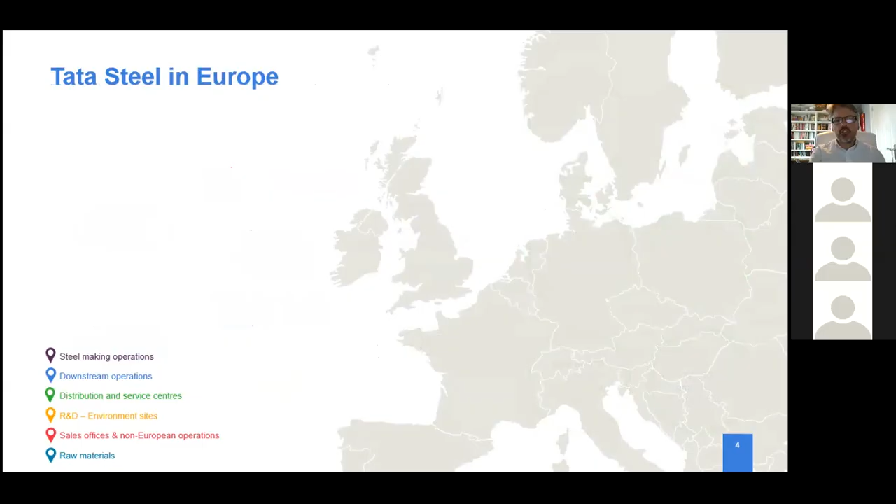In terms of Tata Steel in Europe, this is a busy slide, but we're one of the most geographically diversified steel producers in the world, or will be. We operate in 25 to 26 countries, with commercial offices in 35. Within Europe, we're one of the largest steel producers. We have two main steelmaking centres in the north of the Netherlands and in South Wales, with quite a few downstream manufacturing bases throughout Europe, which will become important later in the presentation, as well as a multitude of distribution and service centres shown there in green. Our R&D and environmental operations are centred in the Netherlands, South Wales and the centre of England.

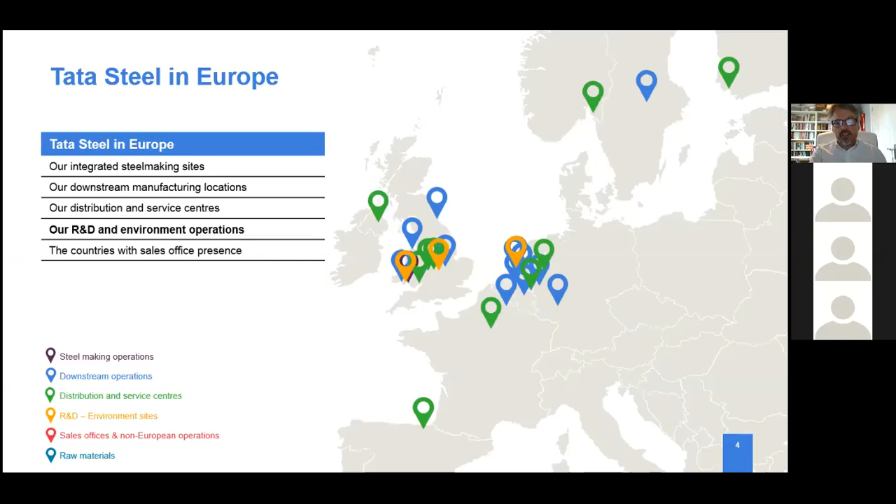In terms of Tata Steel in the UK, we're the largest steel company, and as such clearly act as a key foundation to many other industries and supply chains. We employ around 9,000 people engaged across academia, communities, and many other external partnerships, some of which we'll talk about today.

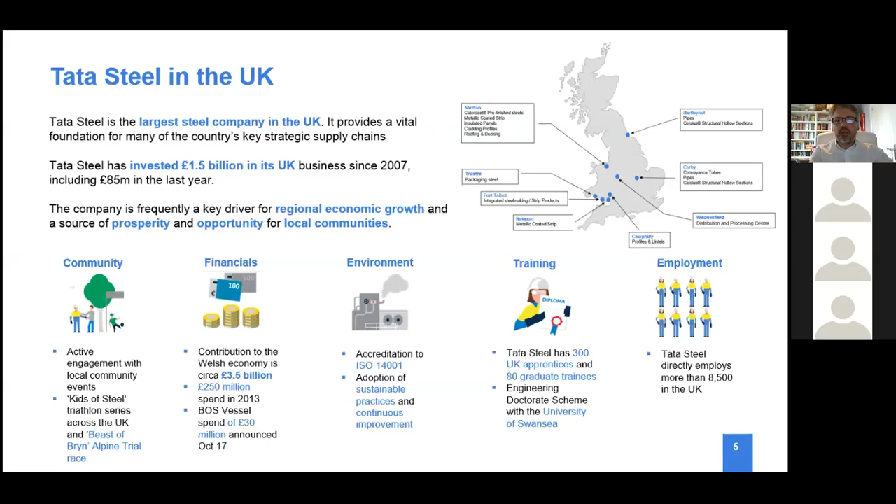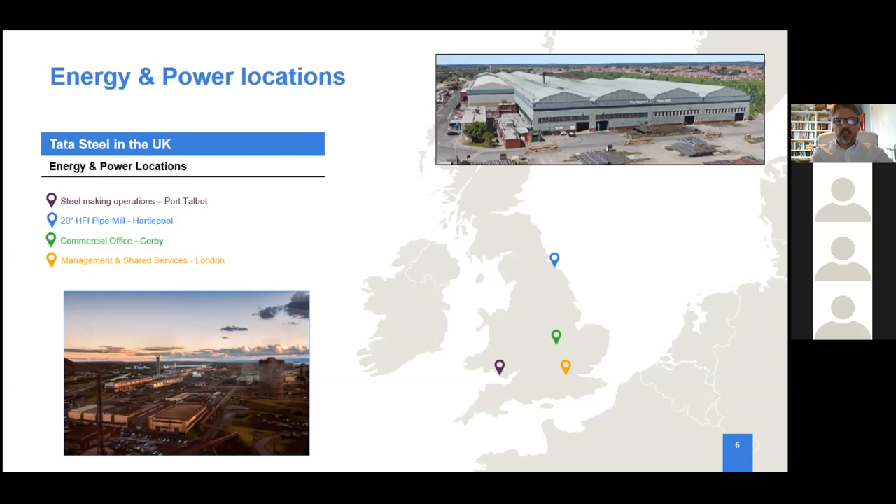Moving a little closer to the pipelines home, we operate our energy and power portfolio out of the UK, which manufactures through a full integrated steel supply chain, with tubular manufacturing facilities in the northeast at the Hartlepool 20-inch mill, and in the centre of England at Corby. From those facilities, we produce offshore and onshore structural materials, as well as a full range of onshore and offshore pipelines, and oil country tubular goods.

With the introductions made, we'll now look at what we see as the main sustainability challenges. These are climate change, circular economy, and being responsible. For this presentation, we're focusing on pathways to carbon neutrality, so clearly climate change is going to dominate, but we do touch on the other areas. If anybody's disappointed that we're not talking more specifically about circular economy or responsible business, I'd be really pleased to engage outside of this call. There's a lot of work I and my colleagues are doing in these areas, both from a corporate, product, process and site perspective, so I'd be really pleased to engage on that.

So I think I'm probably teaching Granny to suck eggs here a little bit, but I think we're all aware of this narrative. Sustainability megatrends are shaping our world, namely, and very importantly, climate change or climate emergency, resource scarcity and demographic shifts. And of course, this is feeding into societal expectations in public opinion, policies, regulatory frameworks, and legislation. And this is clearly impacting on business, the business environment, and businesses need to address these risks and opportunities as well associated with this impact.

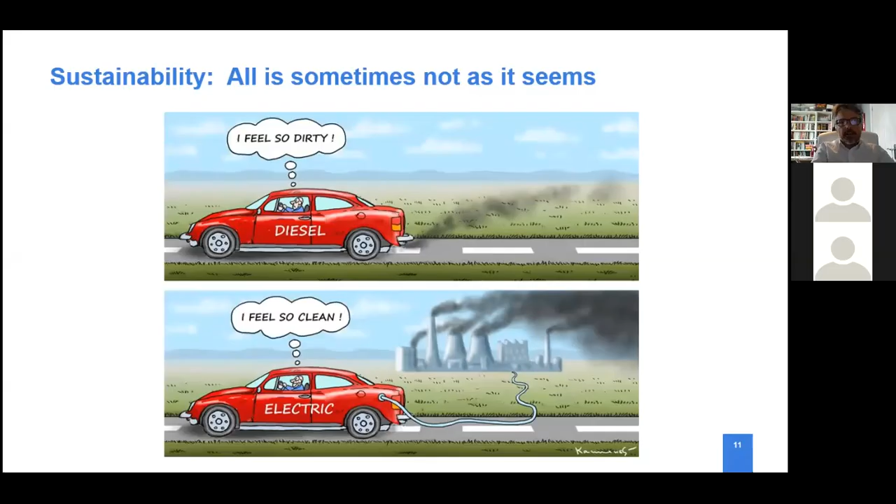In terms of Tata Steel, our vision aligns with the main sustainability challenges, so our mission is to decarbonize our processes, clearly in line with legislation, but we've got some key milestones there around 2030 and 2050. In addition, to work with other industries to leverage circular economy and ensure nothing is wasted. And steel companies, not just Tata Steel, but steel companies are pretty good at that already. And I go on to talk a little bit about that later on.

And our aim, of course, is to continue to operate as a responsible business that benefits people, partners, society, you, me.

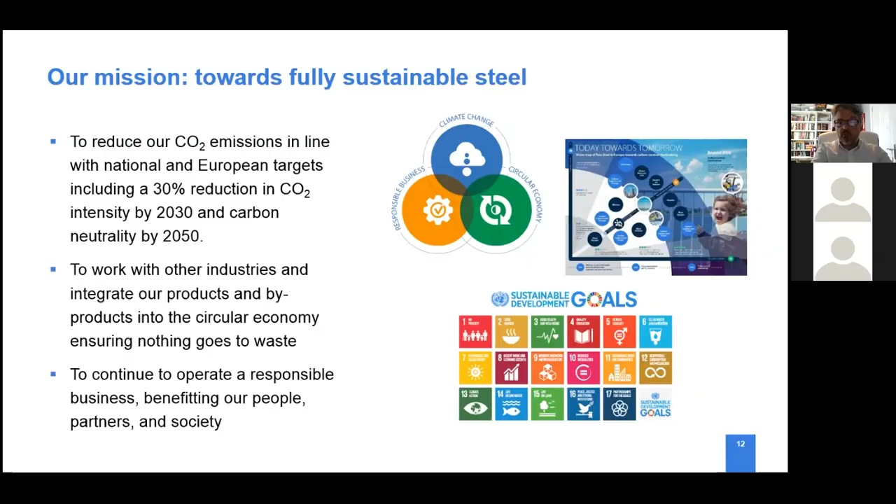In terms of the challenges I outlined, Tata Steel are active in the development, if we look at climate change to start with, of a phased plan to deliver carbon neutral steel making. We're going to drill into that today. That'll include low CO2 steelmaking technology and wider technology that's going to be required, including infrastructure and infrastructure technology. And external partnerships and collaborations are critical in that.

In terms of circular economy, I've already mentioned the importance of life cycle, and we continue to drive this message of life cycle, whole life costing, whole life carbon, and life cycle assessment across the sectors that we work in within Tata Steel. We're able to do this because that group of people I mentioned earlier on in Tata Steel's environmental operations, they're world-class life cycle assessment guys and girls, and they have distinct world-class expertise across this. So they're instrumental in helping us develop our products, including our augmented products, to minimize natural resource use and develop more and more design for reuse, recovery and recyclability across all of our sectors: energy, automotive, construction.

In terms of responsible business, a key area I think for this is transparency and reporting. If you're not transparent and reporting, then you're nowhere. And to a certain extent, performance is less important than transparency and reporting initially. It has to start with transparency and reporting. And I think, I would say this, of course, but I think we hold some leadership positions in some areas of our transparency and reporting.

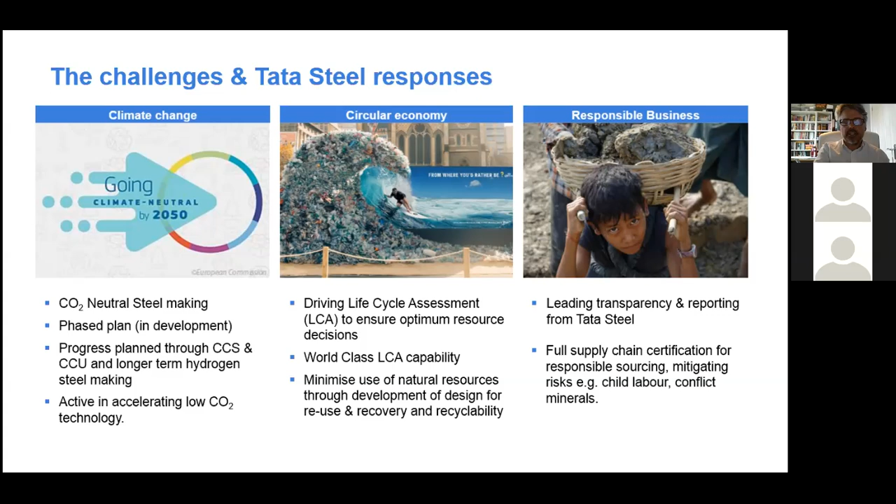So we're the only steel company in the world that operates an environmental product declaration program under ISO standards. So we're able to deliver bespoke product environmental declarations across our portfolio. And we're doing that today from a standing start of 2.5 years ago with no third-party verified international first-class EPDs. We're now got over 30. I'm on the governance committee for that environmental program, and we have plans to produce another 15 or 20 in the next 12 months. We also have the largest portfolio of products certified as responsibly sourced against a standard called BES 6001, which is an external third-party annual verification program that looks at a complete suite of variables, including right back to iron ore and raw material extraction.

Our focus today, however, is on pathways to carbon neutral steelmaking and pipelines. So we'll move on to that now.

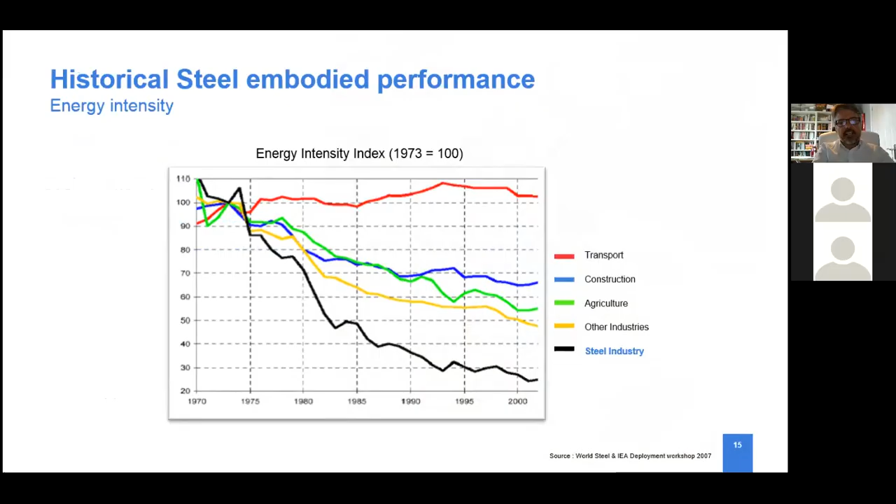So if we're going to look at those pathways, I think a good place to start is probably with history. And this slide here, slide 15, I wanted to take a quick look at historical embodied performance in the next two slides. And that brings us to our potential pathways and our roadmap options, if you like, to carbon neutral steelmaking.

In short, in the short term, this involves working with best available technologies and aligning our asset strategy to ensure that we don't make decisions today that impact on our agility for decarbonization investments tomorrow. And like many heavy industries, the steel industry investment cycles are long, and assets typically last a long time. So investment cycles 10 years plus, asset lives 20, 30 years. So that asset alignment, whilst it's quite a simple statement to make, is a really complex area and a really important activity that we need to undertake.

In the medium term, it's a mixture of measures for rapid decarbonisation, including carbon capture and storage, and carbon capture and usage, and various industrial symbiosis activities. And we'll drill into that also.

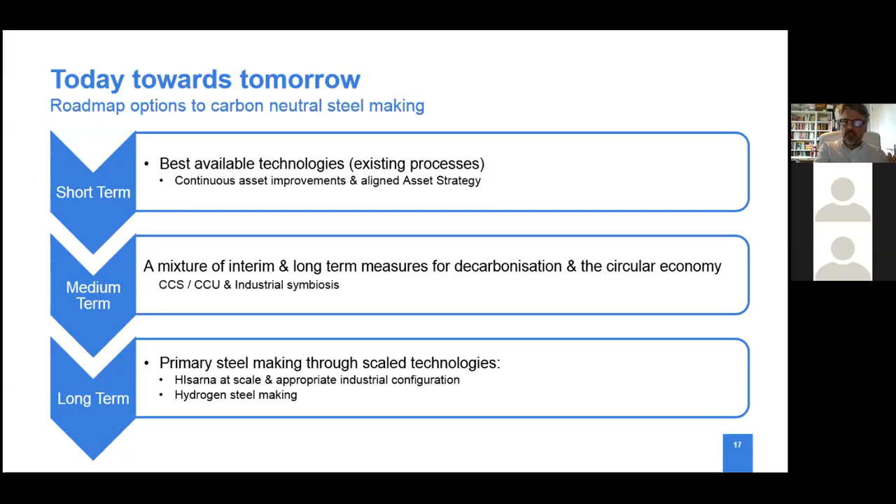In the longer term, we are looking to new and scaled technologies to deliver carbon neutral steelmaking. Some of those will include low CO2 steelmaking technologies that are available today, like Hisarna, which is a Tata Steel technology. And it'll include other technologies, including, for example, hydrogen steelmaking, and we'll talk a little bit about that today. I think it's important to point out now that there'll be no one golden bullet or solution. This will be a mixture of technologies over a period of time to maximize the acceleration of the decarbonisation process.

So if we start with that technology I already mentioned, Hisarna, which I think is an old Saxon term for iron, but I can't swear to that. This technology was initially developed as part of a 48-company conglomerate or network called ULCOS, the Ultra Low CO2 Steelmaking Consortium. Tata Steel bought the rights to this technology completely a few years ago, so it's now Tata Steel's technology, and we've invested in a large-scale plant. We're producing around the equivalent of about 60,000 tons of steel per annum, so a relatively small plant if we consider that the steel plant next door could make up to 4 or 5 million tons.

But we've been running trials to develop and optimize that technology. And the benefits of Hisarna become clear when you compare it with traditional basic oxygen steelmaking, which is typically shown there on the graphic, the blast furnace graphic there on the left.

That process requires coal preheating and iron ore melting prior to putting that coking coal into the blast furnace, and the sinter, the melted iron ore, into the blast furnace. With Hisarna, these processes are not required, and you can directly inject into the Hisarna vessel, or it's called a cyclone. The benefits in terms of carbon reduction or reduction in carbon intensity were estimated theoretically at around 20%.

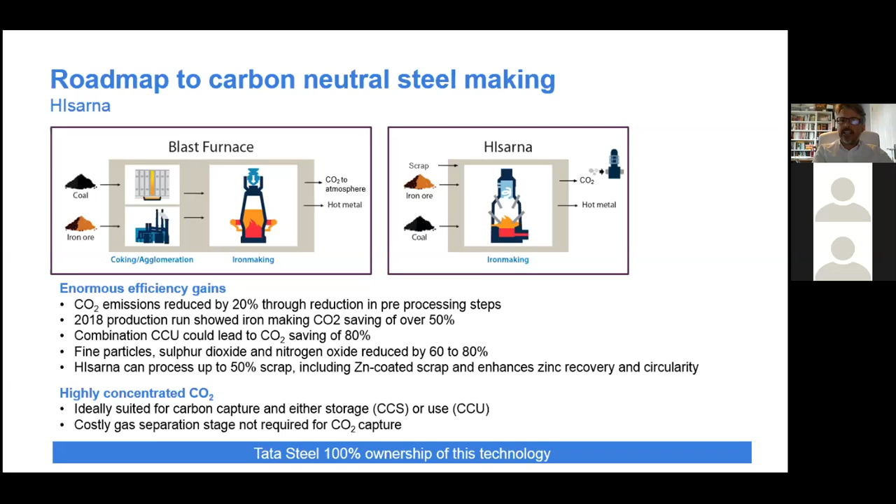So we move to another technology that's going to be important in the medium term, which also aligns with the Hisarna technology, and that's carbon capture and storage. Clearly, this is an interim measure as carbon is still being produced at scale, albeit it is being captured. Whilst it is an interim measure, it does offer opportunities for rapid decarbonisation.

There are challenges with carbon capture and storage, both in terms of the capture and the storage element. One solution for storage is the use of depleted gas fields, and we've seen relatively recently the appraisal and injection license granted to Pale Blue Dot Energy. I attended a webinar only a couple of weeks ago, maybe it was last week, with Pale Blue Dot Energy on their Acorn carbon capture project, and a really exciting project it is too.

Tata Steel have also been involved in a number of projects in this regard, and one of them shown here on the left-hand graphic is the Athos project, looking at the feasibility of such storage, in this case in the North Sea Canal industrial cluster.

So whilst there are still significant challenges in this area, the feasibility for Athos was very positive, and I think that's probably a measure of Pale Blue Dot Energy in terms of the feasibility of this technology.

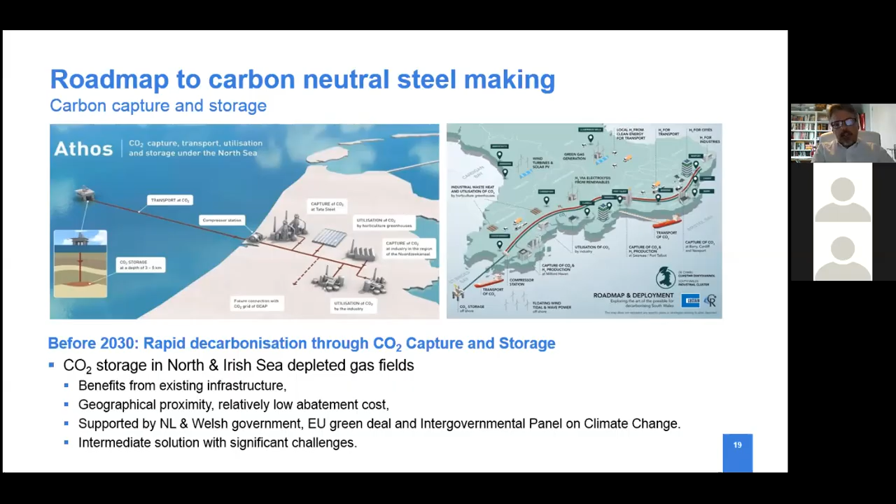Moving further forward in the technology picture, there's now industrial symbiosis, and we have a project here called Everest, and this is examining the use of the emissions created during the steelmaking process to create a circular economic value chain, by converting those emissions into useful feedstocks for other industrial processes.

I have to say, I don't understand the equations or the chemistry here, but we're working with a number of major industrial partners, including, as shown here, Dow Chemicals, to drive this work and take those waste streams and use them as inputs for other industrial processes.

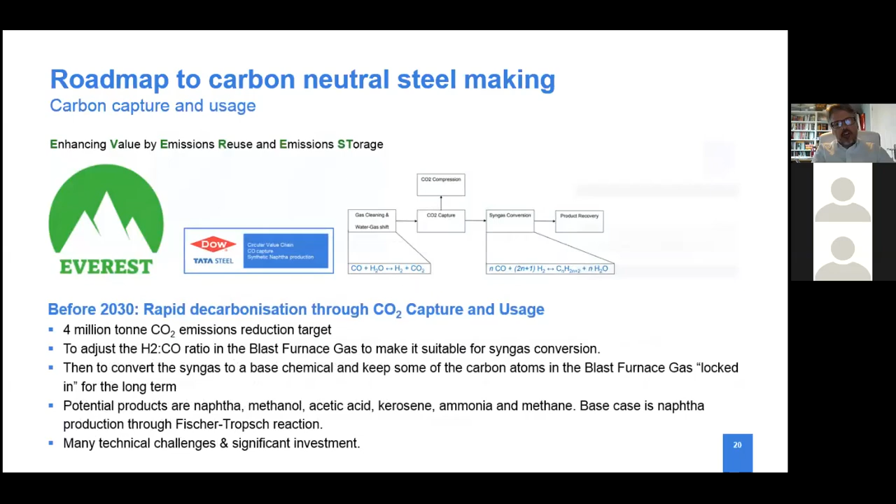A little bit further into the future, and a little bit further back in terms of the technical readiness, one potential solution for decarbonisation of the steelmaking process is the use of hydrogen as a reductant in the iron making process. Typically a reductant in basic oxygen steelmaking, or the iron making process for basic oxygen steelmaking, is to use coking coal to reduce the iron.

But of course, the effect there is to produce CO2, and hydrogen reacts with iron ore in a very similar fashion to the coking coal, but rather than CO2 being the byproduct, H2O is the byproduct, so water vapor, which is clearly a lot more beneficial than carbon dioxide. Hydrogen also has a huge potential for wider industrial decarbonisation, and also for decarbonisation of transport potentially as well.

But there are a number of challenges in this area. A process known as electrolysis, effectively splitting water into its component elements of oxygen and hydrogen, has the potential to deliver clean, low carbon hydrogen, but requires a significant amount of energy to do so.

So we can of course use gas to do that and create grey hydrogen, or we can use gas to do that and capture it, creating blue hydrogen. But clearly, for decarbonisation at scale, we need green hydrogen, that's hydrogen produced with energy that's renewable. Therefore, in order to drive that decarbonisation, we need to see a decarbonisation of the primary energy mix.

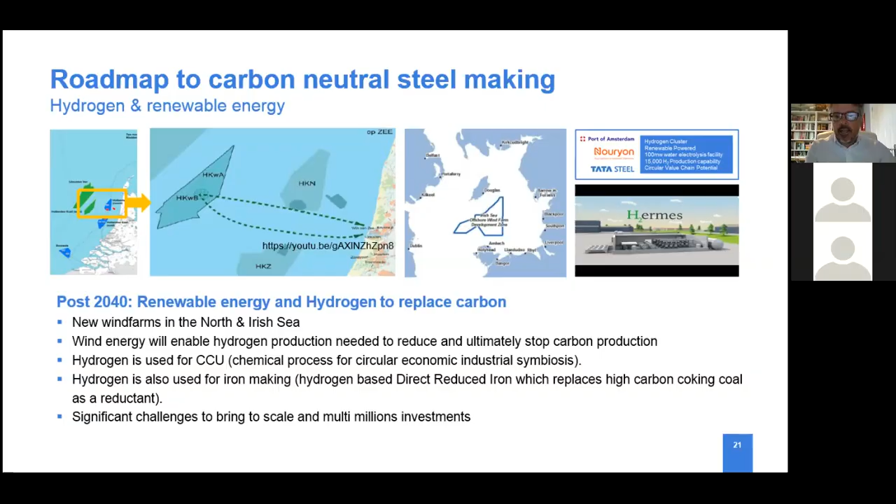We haven't got time to drill any more into that area, but I've been talking consistently about the challenges associated with the pathways to carbon neutral steelmaking. It's probably fair to say that industrial decarbonisation is, and will continue to be, a major challenge for us. I thought it was worth outlining a few more specific challenges for steel. In comparison with other industrial decarbonisation, scale is a big issue for steel. Steel is the most used metal in the world.

It's also the most recycled metal in the world, and it's central to many sectors, from mobile communications - whether that's the communications equipment or the outside of your mobile phone - through to transport. So it's a key foundation industry. In terms of challenges, first of all, I'd like to reiterate the energy mix challenge. Steel plants in Europe are already fairly efficient.

We have in place the capturing and reuse of waste, whether that's waste gas or waste heat from the iron making process that goes to the steel plant, or whether it's taking the waste from steel and feeding it as feedstock to other industries. For example, the concrete industry uses ground granulated blast furnace slag, which is a waste product from the steel making process. By using that to make concrete, it saves millions and millions of tons of CO2 compared with the other alternatives for the concrete industry.

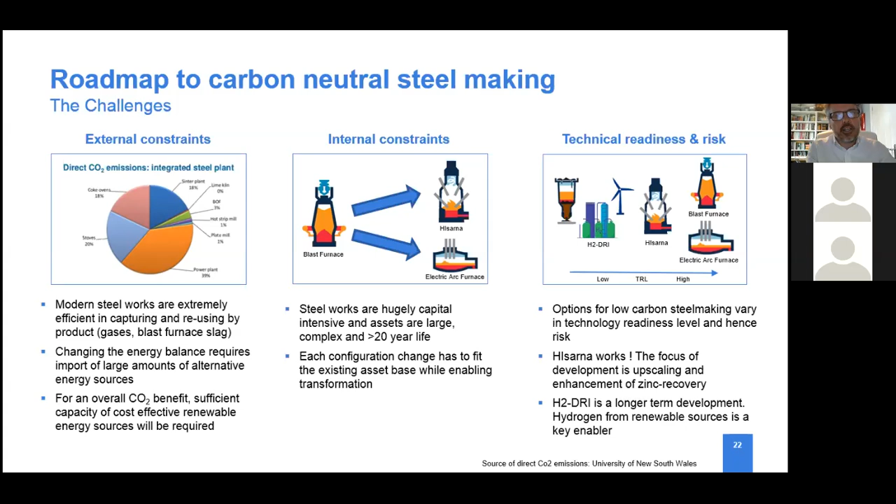This is why industrial partnership and collaboration, which you've seen through the last 3 or 4 slides - I don't think there's a single slide that didn't include an external industrial partner or technology provider - is going to be critical going forward. I'll touch on that as well at the end of the presentation on everyday sustainability, actually let me touch on it now.

It's natural for a presentation such as this, focusing on industrial decarbonisation, to look at medium and long-term solutions by their very nature. Of course, we need to work hard today on those medium and long-term solutions if we're going to deliver them. However, we're also working today delivering decarbonisation.

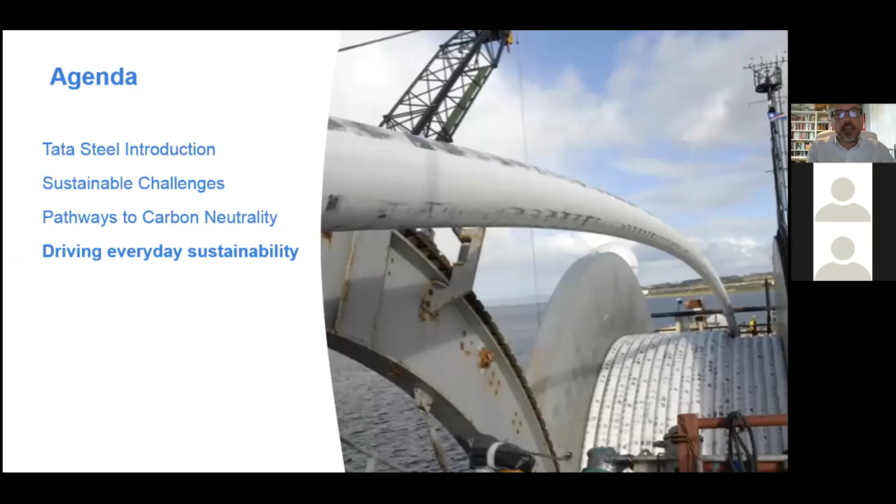I just wanted to touch on how, as an industry, the pipelines industry, we can do that through partnership and collaboration. It's really not rocket science, of course. Many of us are doing it on a day-to-day basis. But if we turn to pipelines for our inspiration here, the first question, of course, must always be, in any resource decision: do we need the resource? Do we need the pipeline? Do we need the building? Do we need the vessel? So the ultimate resource efficiency, of course, is not to use those resources.

However, if we assume that there is a valid need, then reducing those resources not only makes financial sense, but reduces our impact on the environment. A classic example of this is utilizing tight tolerance manufacturing processes, such as welded pipelines, to reduce the amount of steel used in pipelines for a given design. I won't spend time going through this example here, and the presentation will be made available separately.

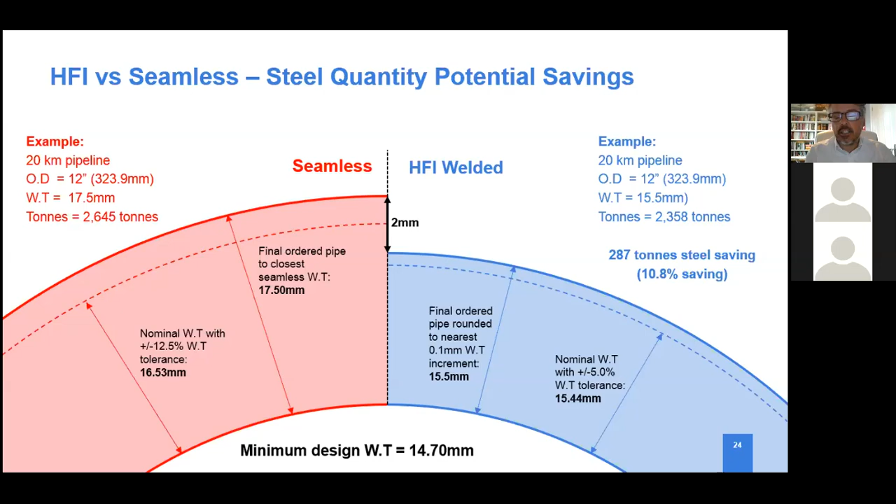Working together as an industry, in collaboration, to drive value right through the supply chain will also deliver resource efficiency. That's a way of continuing to drive everyday sustainability and to make improved resource decisions. It's not just about reducing the amount of steel that you purchase by being clever in purchasing the right steel. It's also about those manufacturing processes and tolerances, and taking advantage of them, not just in the material, but in the downstream processes. With those tight tolerances, for example, we deliver faster fit-up and improved welding speeds during construction, all of which deliver downstream reductions in resource use, therefore delivering resource improvements through the value chain.

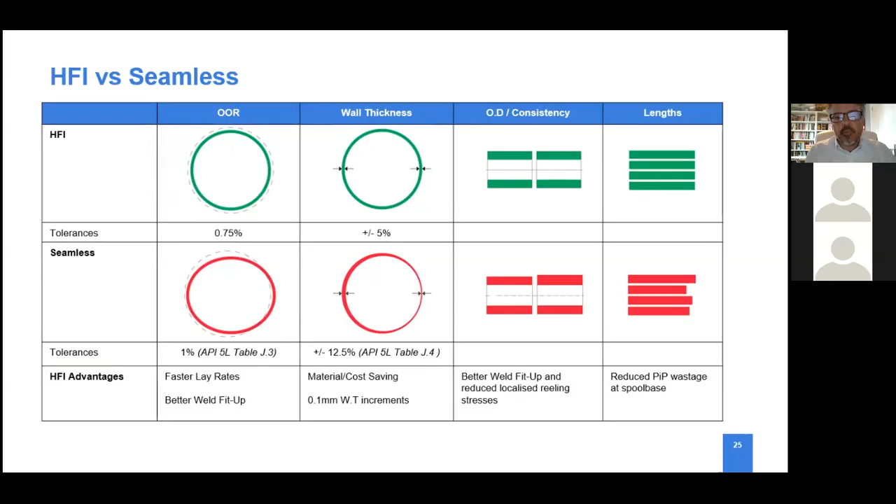Finally, innovation has a really important part to play here too. I've focused on new product development here on the left, but I think as an industry we can continue to work in collaboration. There are many good examples of such collaboration, but I think we can do more in areas such as new product development to deliver further resource efficiency. This means understanding the downstream needs, delivering it back upstream to make the right manufacturing and asset investments, and to make the right product development investments.

This might be related to the physical product, or it might be related to the augmented product, the data associated with that product. Unfortunately I haven't had time to go into some of the data work we're doing and the ambitions we have in that area, but it's going to be a really important area going forward to deliver both financial and resource efficiencies.

If we move to the central graphic here, I wanted to point out a process within Tata Steel. It's called our NPD, or New Product Development Sustainability Assessment. This process compels us to assess the environmental sustainability of the products we're working on developing, and that assessment becomes a core part of the business case. The assessment itself is based on a given chosen baseline, whether that's an existing product from Tata Steel or a competitor's product, and the choice of that baseline is clearly critical.

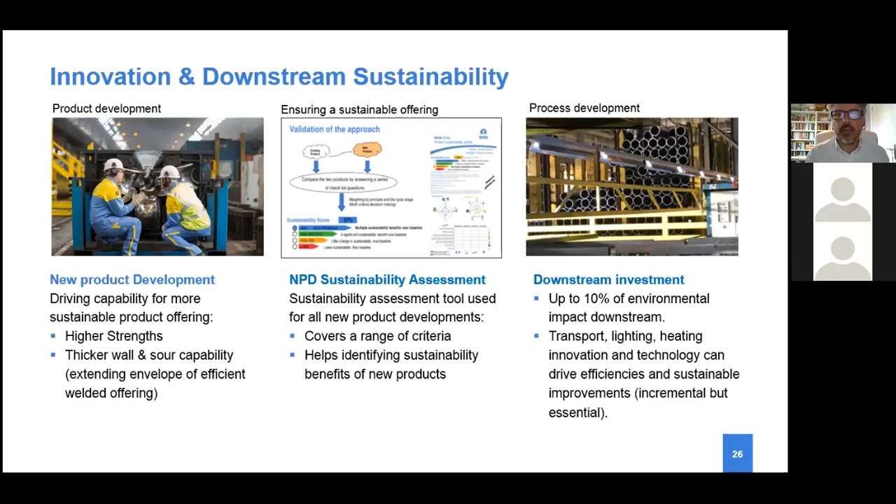I'm not sure what time we have. What are we, 41? It took a little bit longer to present than I anticipated, but that was a whirlwind through a big subject area.

I'm happy to take questions now, but if we run out of time, please put them in the chat box. I've been promised by the Guild that I will receive those questions, and I promise to answer them in writing to the individuals who present them. I'll leave my email there should you wish to contact me directly, and maybe take up some engagement separately, which I'd certainly welcome. That concludes the presentation.

Thank you, Barry, and thank you all for dialing in. I, like a graceful swan, have been flapping around in the background trying to stay connected, so I've unfortunately missed a few of your slides and moments through the presentation. I'll be catching up on this one, as I have a few of the other webinars on the Pipeline Industry Guild YouTube page, so once it's uploaded I'll dive into it and take today's presentation on board.

I do have one question for you though, Barry, around that early engagement piece you picked up on, regarding whether we should undertake the works or construction of a new pipeline or structure from a steel perspective from day one. I wonder how often Tata Steel as a whole get involved with client organisations, consultants and designers at that early stage to develop solutions, and about some of the R&D you mentioned. Apologies if you touched on it already - I was flapping a bit like a swan under the water trying to stay connected.